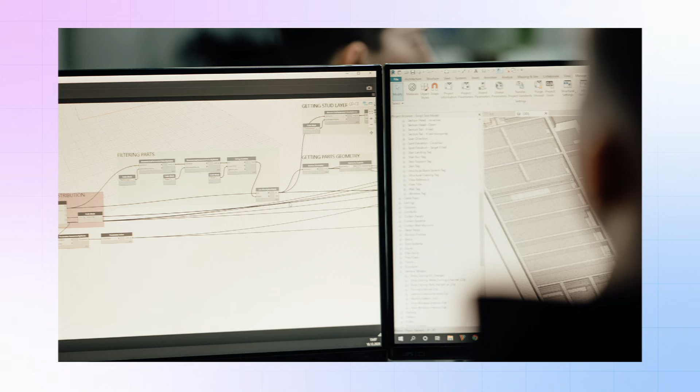Second, information. This word is the beating heart of BIM. It's really the most important part. BIM is all about information, not 3D models, not just graphical appearance. Without accurate, reliable, and coordinated information, the model has no value. Trusted sources like NBS and buildingSMART emphasize that information in BIM means creating a single reliable source of data that the whole team, architect, engineer, contractor, and owner can access and make decisions from. That's why BIM is truly an information revolution in construction, not just a graphical improvement.

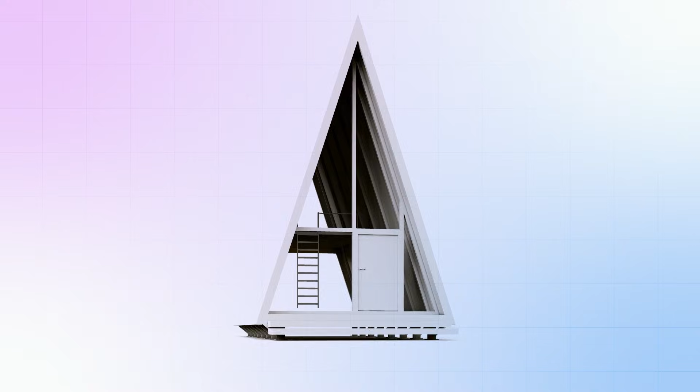Third, modeling. Here's another common misunderstanding. Modeling in BIM isn't just 3D modeling, like computer game models. Modeling in BIM means building an information model, a model that combines geometry with technical, financial, and time-related data. In BIM, form and shape come together with metadata, technical specifications, costs, construction schedule, and different decision-making scenarios. Simply put, a BIM model isn't just pretty, it's functional, simulatable, and decision supporting.

When we put these three words together, we see that the name BIM was carefully chosen. It starts with the built asset, focuses on information, and uses intelligent modeling to create an integrated system. The early ideas of BIM go back to the 1970s, when Charles Eastman, often called the father of BIM, introduced the concept of a building information model.

But the term building information modeling itself emerged in the 1990s, and by the early 2000s, people like Jerry Laiserin helped make it a global and standardized concept. Today, BIM is part of international standards like ISO 19650, focused on managing information across the entire project lifecycle. Interesting, isn't it? Three simple words, yet behind them lies a deep transformation of the entire construction industry.

The story of BIM's birth. Now, let's take a step back and hear the real story of how BIM was born. A story almost like a historical movie, full of new ideas, scientific efforts, and a journey that slowly turned into a global standard.

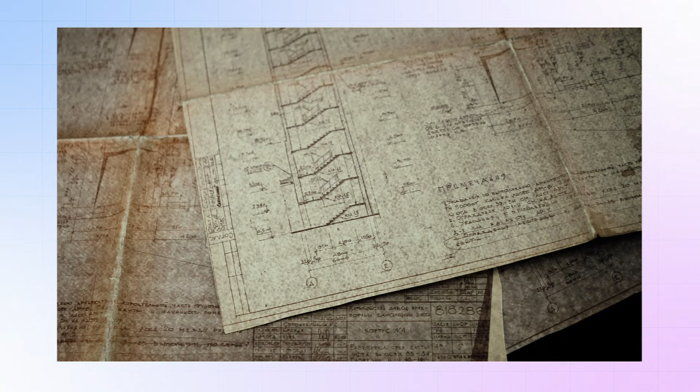The roots, 1970s. It all started in the 1970s, a time when computers were just beginning to enter the world of design. During this period, an architect and computer science researcher named Charles Eastman was working at universities like Carnegie Mellon. He noticed a major problem early on: manual 2D drawings required countless manual updates with every small change, were full of errors, and project information was scattered everywhere.

Eastman realized the problem wasn't the drawings themselves, it was the lack of a cohesive model of building information. In 1975, he published a paper introducing a system called the Building Description System. This was a turning point. For the first time, a building wasn't just lines on paper, but a set of intelligent components with defined relationships, technical data, and parametric properties. BDS had capabilities that we recognize in BIM today: parametric modeling, conflict detection, and even automated drawing production.

In other words, the foundations of modern BIM were laid there, and that's why Charles Eastman is often called the father of BIM. The 1980s, 1990s, the software era. Eastman's idea started mostly as a theory, but in the 1980s, real software tools began to appear.

Companies started developing applications that brought this idea closer to practical reality, including RuCaps in the UK, one of the first systems to implement something like modern BIM. Sonata in the mid-1980s, often called one of the first truly BIM-capable software. Later, Reflex, a more user-friendly tool with 3D information-based modeling and even scheduling features. These tools proved that the concept of a building information model was doable, not just an academic theory.

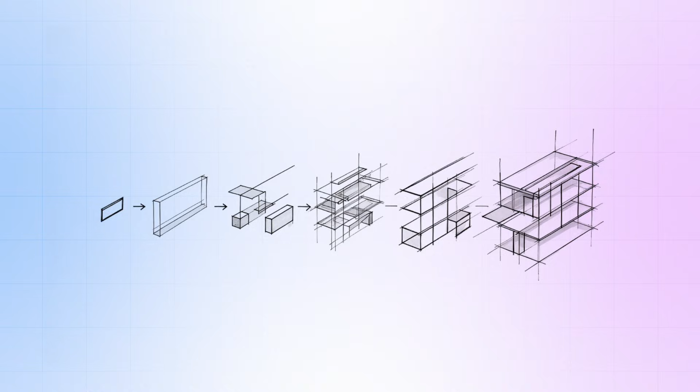By the 1990s, the concept of BIM itself started to take shape. The term building information modeling was first used in 1992 in a research paper by G.A. van Nederveen and F.P. Tolman. But the person who really introduced the term into professional practice was Jerry Laiserin. In the early 2000s, through articles and presentations, Laiserin positioned BIM as a digital, collaborative process for the entire construction industry, turning it into a global concept.

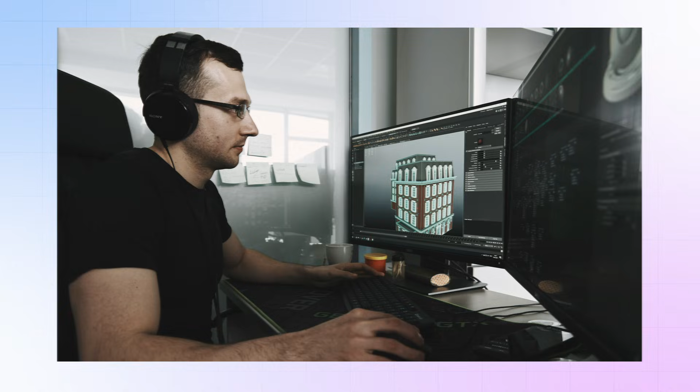2000s and beyond, explosion and standardization. From the early 2000s, BIM was no longer just an idea or a specific tool, it became mainstream. Software like ArchiCAD, Revit, and Bentley Systems products brought BIM into the core market. In 2011, the UK government announced an official BIM strategy, and by 2016, BIM Level 2 was mandatory for public projects.

This was one of the first major BIM mandates in the world, paving the way for other countries. Finally, in 2018-2019, the ISO 19650 international standard was published, defining BIM as information management across the lifecycle of built assets, and forming the basis for many standards used today.

In summary, the story of BIM's birth is the story of a scientific idea in the labs of the 1970s that grew over the decades and eventually became a global necessity. The most fascinating part? BIM was born from a real problem, scattered information, and without anyone initially imagining it, it came and transformed the entire construction industry.

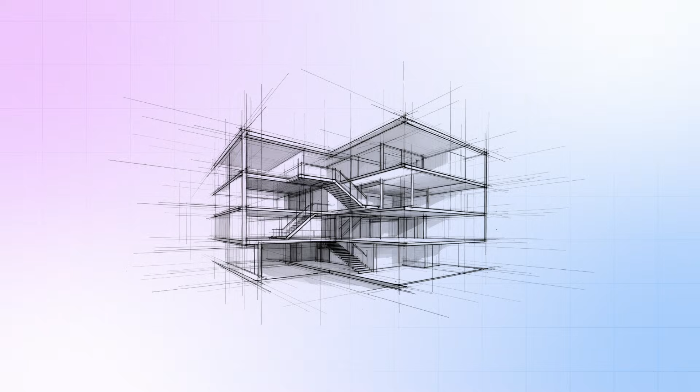The core issue of BIM. What problem was BIM meant to solve and what not? Now we come to the key part. The main question is, what problem was BIM really created to solve? Let's answer this without slogans, without exaggeration, and by looking straight at the roots.

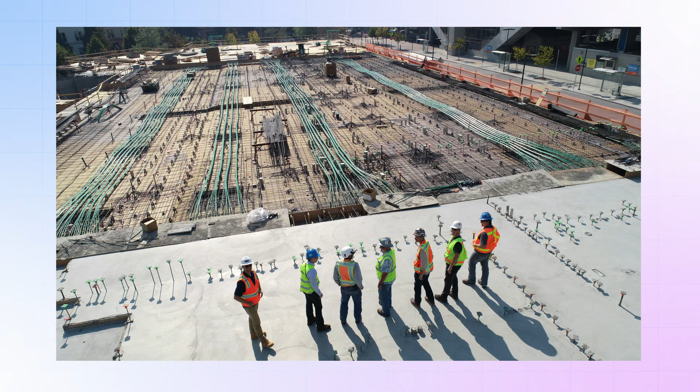The main challenge in the construction industry, or AEC, architecture, engineering, and construction, has always been the same: fragmentation and siloed information. Every team produces its own set of data: architects, structural engineers, MEP engineers, contractors, and finally, the owner. This information usually lives on separate 2D drawings or completely independent files. And here lies the problem: when all this information needs to come together, the result is often inconsistencies, errors, rework, delays, and extra costs.

Charles Eastman, the so-called father of BIM, pointed this out back in the 1970s. He said traditional drawings are inherently repetitive and inconsistent because every small change requires dozens of manual updates, and the risk of error is extremely high. This is where BIM was born.

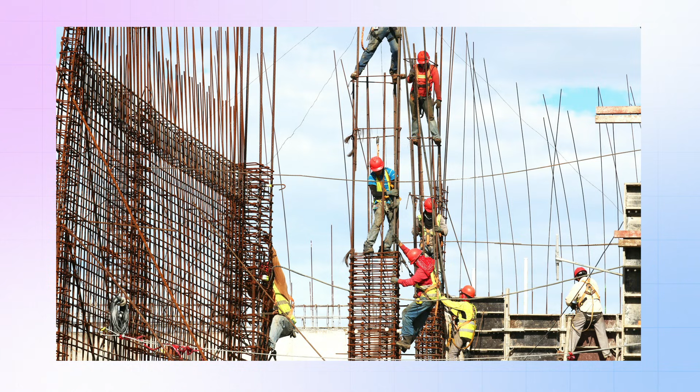The goal of BIM was to create a single, reliable source of truth, a smart digital model that contains all project information, accessible to all teams, where any change is automatically coordinated across the project, not just in design, but across the entire project lifecycle, from design to construction to operation and even demolition.

In this context, BIM has truly succeeded in tackling or reducing these problems, minimizing rework and coordination errors through clash detection, reducing wasted time and materials, creating real connections between different project phases, better cost control, reducing financial shocks from late changes, simulating real building behavior before a single brick is laid.

According to trusted sources like McKinsey and buildingSMART, integrating information with BIM can significantly boost productivity and make costs more predictable. But here's a very important point.

BIM is not a miracle, and it was never meant to solve every problem in construction. Many challenges in this industry aren't technical, they are human, managerial, and cultural. And these aren't things that a digital model alone can fix.

For example, if the culture of collaboration is missing, even the best BIM model is useless. If there isn't proper training and skill, BIM just becomes an extra cost.

Contractual and legal issues, like data ownership or risk allocation, cannot be solved by BIM alone. They need the right legal framework. Resistance to change or high initial costs, especially in traditional organizations, are human, not software problems.

BIM can show the problem, but the final solution always depends on human decisions. And of course, BIM cannot solve material shortages, supply chain issues, or a lack of skilled labor.

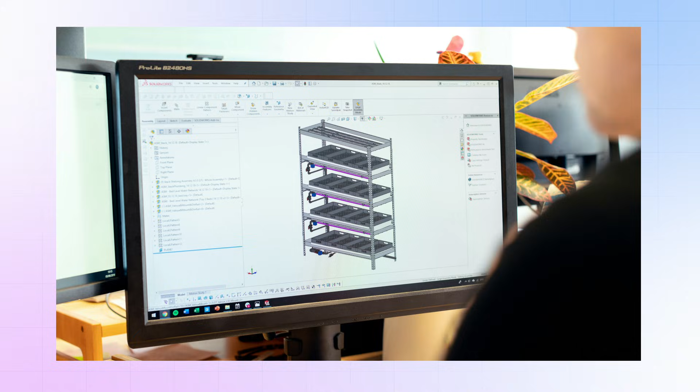So, in summary, BIM was born to solve information and coordination problems, and in this regard, it has truly succeeded. But deeper challenges in the construction industry, like work culture, weak project management, or economic pressures, are not things BIM can handle alone. Real success happens when BIM is used alongside proper processes, adequate training, and a shift in management mindset. And this is exactly where BIM transforms from a software tool into a professional way of thinking.

Misunderstandings and criticisms of BIM. Why do some people speak badly about BIM?

Now we get to a sensitive and honest part of the story, the place where many construction professionals either criticize BIM or feel disappointed by it. And these criticisms aren't entirely baseless.

According to trusted sources like Dodge Data and Analytics, AEC Magazine, Autodesk University conferences, and real project experiences, most BIM failures aren't caused by the concept itself, but by misunderstanding and poor implementation. Let's look at the main reasons straight up.

1. Poor implementation, the biggest killer. Many criticisms start here. Companies install BIM, but leave their old processes untouched. They think that buying Revit or ArchiCAD and creating a 3D model means BIM is implemented. But without a BIM execution plan, proper training, and a shift in organizational culture, the result is often disastrous.

McKinsey reports and global experience show that many projects at the start don't just fail to increase productivity. Teams often feel that we're working more, but not getting more value.

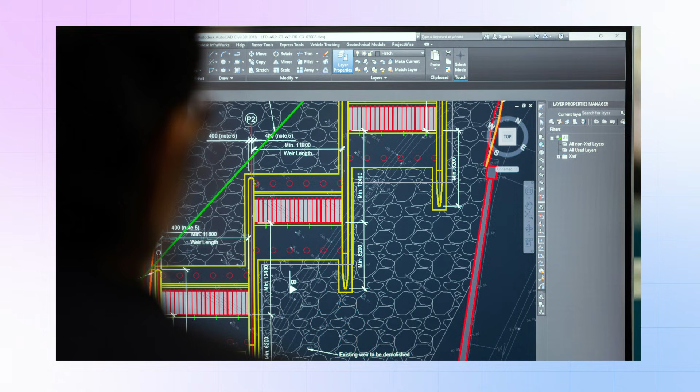2. Focusing on software, not process or thinking. This is perhaps the most common misconception. Many equate BIM with 3D modeling software. The result? Shiny, beautiful models that are rarely used for real decision making.

In the industry, this is called Hollywood BIM or even BIM washing. Models built more for presentation than for information management, analysis, or risk reduction.

3. BIM as a bureaucratic requirement, not a thinking tool. In some countries, like the UK, which made BIM Level 2 mandatory for public projects in 2016, BIM became a checkbox. Models are created just to tick a box, to win a project, or pass a tender stage.

This is called tick box BIM or compliance-only BIM. In this scenario, real collaboration doesn't happen, and BIM is reduced from a transformative way of thinking to a bureaucratic task. Naturally, people get frustrated.

4. Heavy models with little real value. Another common complaint, BIM files become too large, slow to work with, and full of unnecessary details. Without proper definition of level of development and level of information, the model becomes a burden rather than a help.

Many professionals say this gets worse when teams add extra details just to make the model look prettier, adding no real value to the project lifecycle. The result?

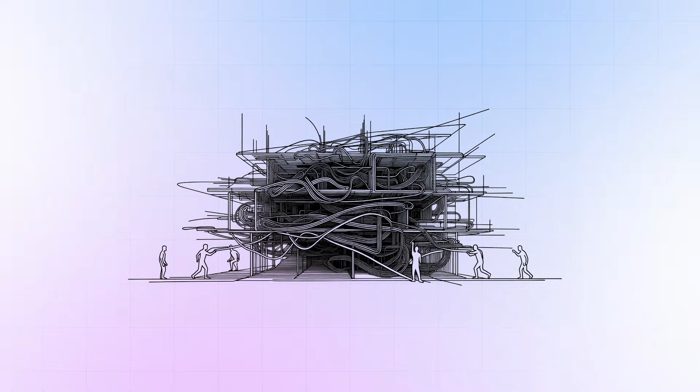Information overload, and wasted time and energy. Other issues include high initial cost, software coordination challenges, and cultural resistance, especially in traditional companies or small projects where BIM may not even be necessary.

And here's the key takeaway: BIM becomes a victim when it is turned from a fundamental change in how we think about buildings into a flashy software tool or an administrative checkbox for tenders. At that point, BIM stops solving problems and becomes a problem itself. This section reminds us that BIM isn't perfect, but most criticisms are about how we use it, not the concept itself. When understood and implemented correctly, BIM remains one of the most powerful tools in the construction industry.

BIM Today. Where does BIM stand in 2025, 2026? Now let's look at today. Where does BIM stand in the construction industry in 2025 and 2026? Let's keep it short, precise, and realistic, not promotional, not pessimistic.

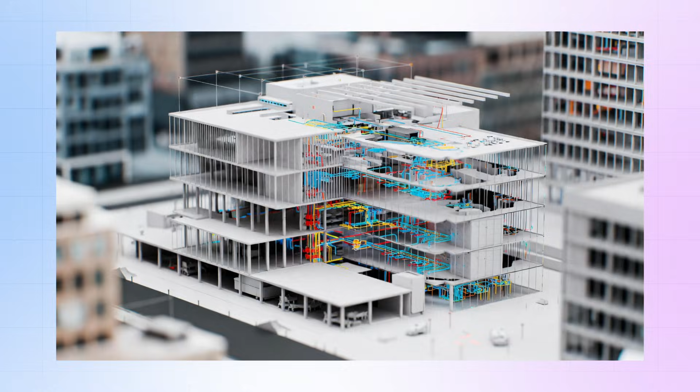Beyond 3D, moving to nD today, BIM is no longer just a 3D model. In many professional projects, BIM has fully expanded into higher dimensions: 4D for construction scheduling and sequencing, 5D for cost and budget management, 6D for energy analysis, environmental sustainability, and life cycle assessment, 7D for long-term facility management. These extra dimensions allow teams to better predict the project before construction, reduce risks, and minimize wasted time and resources. Especially on large projects, BIM is now directly connected to financial, temporal, and environmental decision-making.

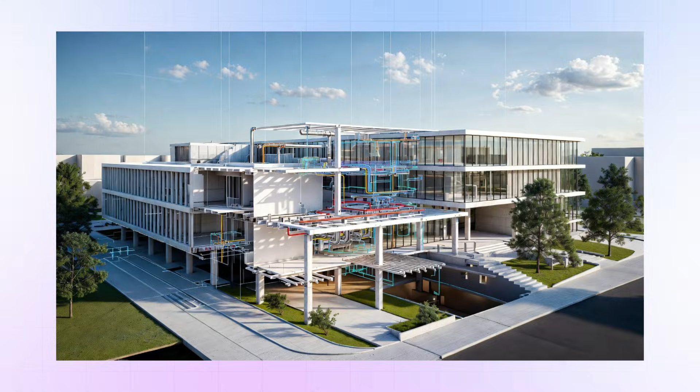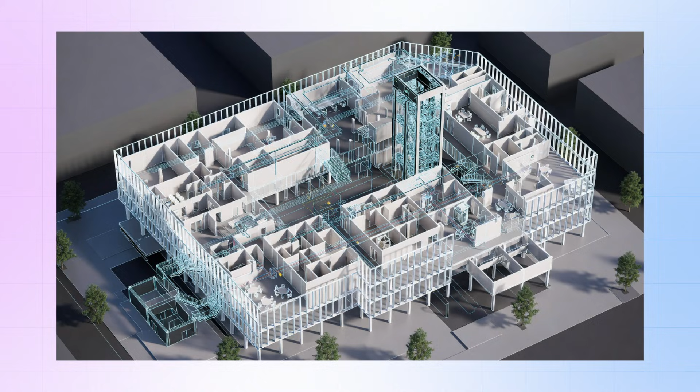Real connection to construction and operation. One of the most important changes today is that BIM is moving out of the design office. BIM now connects directly to construction through cloud collaboration platforms, on-site AR and VR, and integration with drones, sensors, and IoT devices. Perhaps the biggest leap, however, is in the operation and facility management phase. Here, BIM becomes the foundation for a digital twin, live models that monitor, analyze, and simulate the building throughout its life cycle. In recent years, delivering the BIM model to the FM team is no longer optional, it's a necessity. Facility managers can now predict maintenance, optimize energy consumption, and manage spaces and assets intelligently. This trend has accelerated in 2025, shifting our view of buildings from constructed objects to living systems.

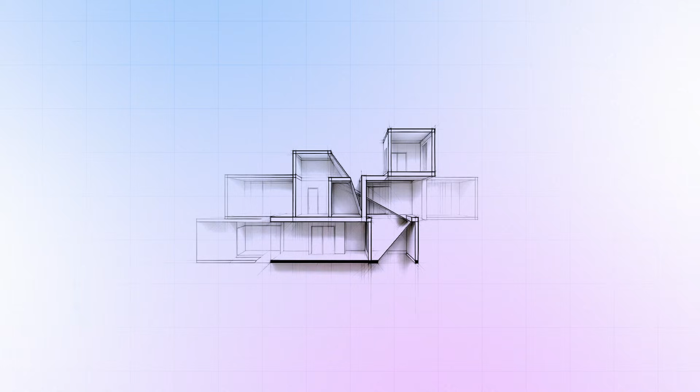The harsh reality: the gap between promise and practice. Despite all these advances, one reality cannot be ignored: BIM adoption worldwide is still uneven. In countries like the UK, according to NBS Digital Construction 2025, BIM use has expanded with focus on collaborative, data-driven processes and even AI integration. But in smaller companies, adoption rates remain low, and in many countries, BIM is still mostly limited to large or international projects. Old challenges persist: shortage of trained personnel, high initial implementation costs, software interoperability issues, and cultural resistance to change. The truth is, the construction industry remains one of the slowest sectors on the path to full digitalization. BIM promises a data revolution, but in many projects, its implementation is still superficial, incomplete, or purely for show.

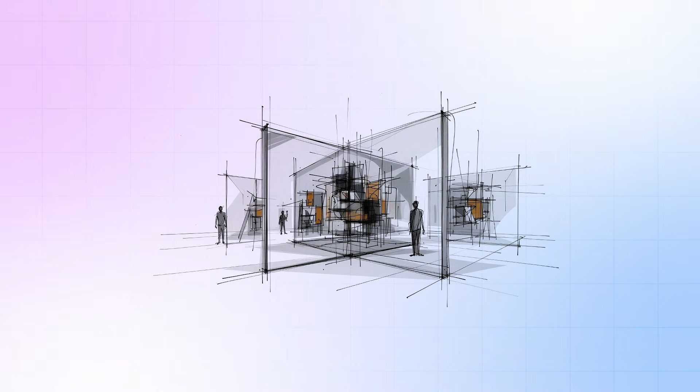To be fair, BIM today is more mature, more powerful, and more essential than ever, especially with the rise of nD and its deep connection to digital twins. But the gap between BIM's true potential and what is actually implemented is still significant. Real BIM success is no longer just about software. It depends on long-term investment, serious training, and most importantly, a cultural shift in decision-making across the construction industry. Perhaps today, more than ever, BIM is a mirror that reflects both the weaknesses and the maturity of our industry.

To sum up everything we've discussed, BIM is not just software, it's not a passing trend, and it's not an administrative checkbox. BIM is a change in the way we think about buildings. From the day Charles Eastman introduced the idea of the building information model to today, where we talk about digital twins and lifecycle management, the core issue has always been the same: the right information at the right time for the right decisions. BIM was born to reduce information fragmentation, increase coordination, and help us think smarter before construction even begins. But as we've seen, BIM was never meant to solve all problems in the construction industry. Without a culture of collaboration, without serious training, and without decisions based on insight rather than guesswork or time pressure, even the best BIM model can't achieve much.

Today, BIM has reached a point where it cannot be ignored, yet it is still not fully understood. And perhaps the most important question isn't, are we using BIM or not? It's, are we really thinking in BIM, or are we just using its tools? Ultimately, BIM is not the future of architecture, nor the future of engineering. BIM is part of our professional maturity in the construction industry. And the deeper this maturity grows, the more the buildings we create will become less wasteful, more sustainable, and more human-centered.